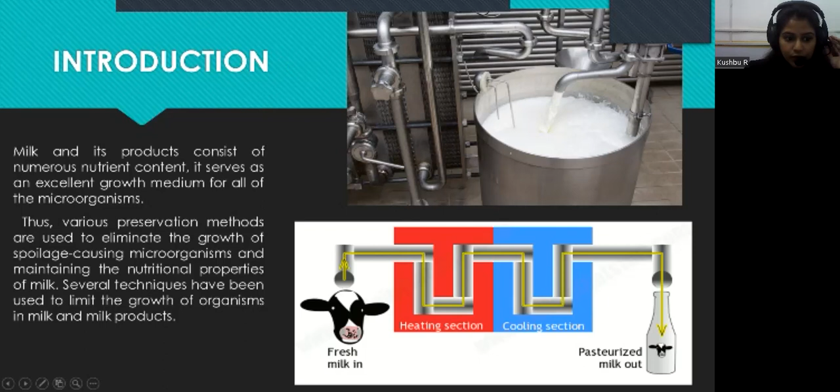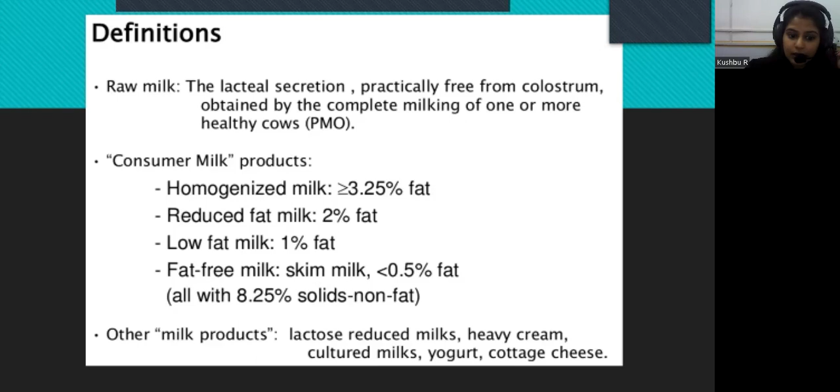Milk is the lacteal secretion of the cow usually, and milk from goats and buffaloes is also used for manufacturing various milk products. Milk is available in various forms based on their fat concentration. Based on percentage of fat content, we categorize milk into types such as homogenized milk, reduced fat milk, low fat milk, and fat free milk, that is the skimmed milk.

The temperature involved in pasteurization or simple sterilization is about 63 degrees Celsius to 105 degrees Celsius. As we increase the temperature, the time duration required reduces, so they are inversely proportional.

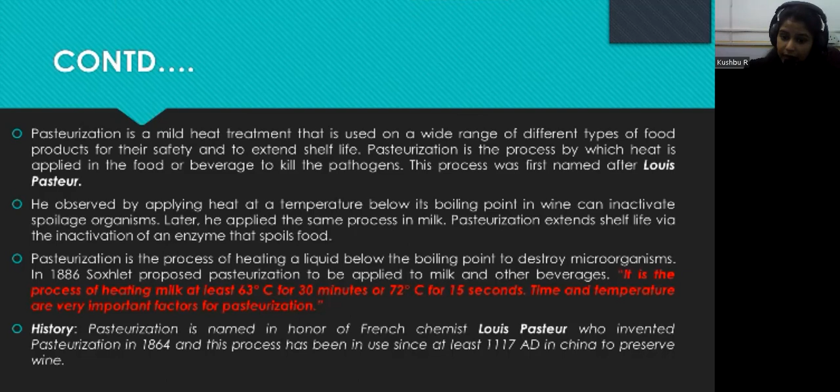One such effective methodology in sterilizing milk is pasteurization, which was invented by a French chemist called Louis Pasteur, thereby the name pasteurization. This is one of the primitive methodologies invented, yet still very beneficial today. Pasteurization is the application of heat at appropriate temperature for appropriate time.

This completely aims at reducing the pathogenic count and also the organisms that can cause spoilage of milk.

Pasteurization is of various types. We call VAT pasteurization or low pasteurization, where the temperature required is minimal, that is 63 degrees Celsius, for a time duration of about 30 minutes. Next we have high temperature short time, where we require about 72 degrees Celsius for 15 seconds.

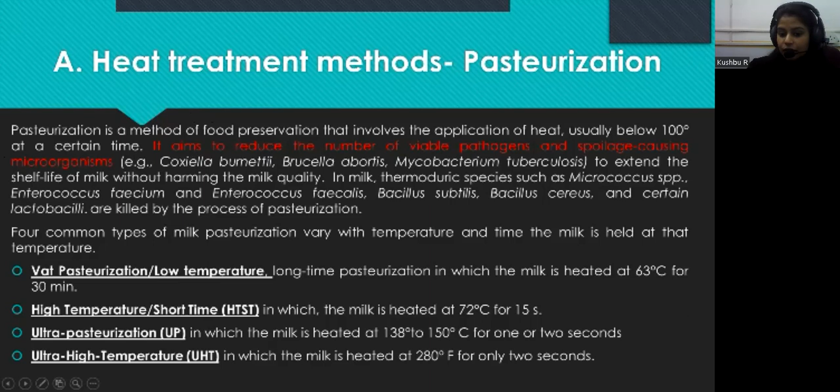Ultra pasteurization uses a temperature of about 138 to 150 degrees Celsius for 1 or 2 seconds, and ultra high temperature is about 280 degrees Fahrenheit for 2 seconds.

We always tend to assume that pasteurization is meant only for milk. Apart from milk, we also pasteurize various other products such as beer, canned goods, dairy products, egg, juice, nuts, syrups, vinegar, water, and even wine.

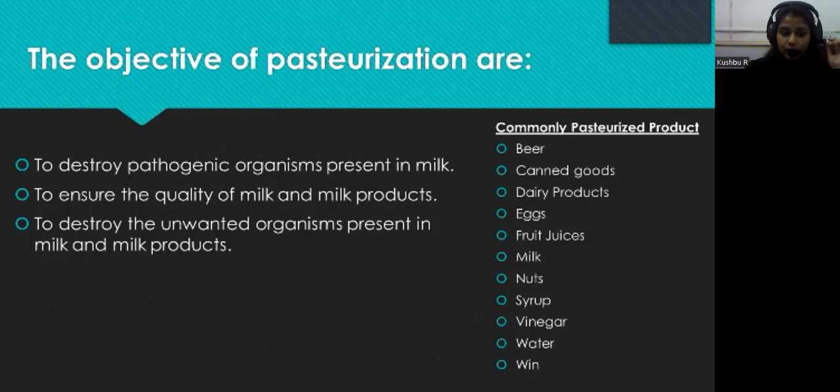The main objective behind this methodology is to destroy the pathogenic organisms present in the milk due to milking, packaging, or processing, and also to ensure the quality of the milk to its fullest, as well as to destroy unwanted microorganisms present.

Regarding the types of pasteurization, high temperature methods have varying temperature with time. Ultra high temperature or ultra pasteurization uses about 280 degrees Fahrenheit, which sometimes not only harms the organisms but also coagulates the proteins. It also damages the vitamins, minerals, and some protein globules present in the milk.

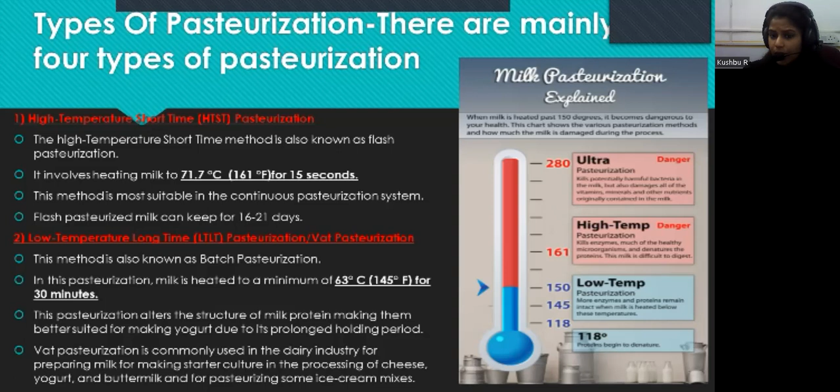High temperature pasteurization kills and inactivates the enzymes, but also gets rid of all the pathogens present. Low temperature pasteurization leaves the proteins and enzymes untouched, removing only the microorganisms. 118 degrees is the most friendly temperature, but above which the protein starts denaturing.

So these are the four types of pasteurization based on their temperature and time, which is inversely proportional. The advantages are maintaining the quality of the milk and making it free from any sort of pathogen. The disadvantage would be that it diminishes the cream line or cream volume.

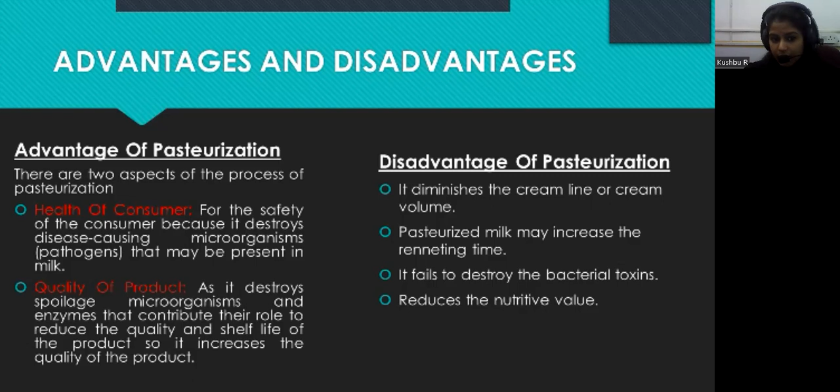Pasteurized milk may also increase the renneting time, and it fails to touch the bacterial toxins. At times the bacteria is not the one which causes the disease, but its toxins. During pasteurization the toxins are left untouched, and because of the high temperature there is denaturation in the protein, alteration in the enzyme or protein globules, making them less nutritive in nature. So using an appropriate temperature is very important.

The next methodology we're going to see in today's class is sterilization or ultra high temperature, which mainly focuses on pasteurizing the milk in such a way that it can be saved or stored at room temperature henceforth. After this sterilization process, it is fit to be stored under room temperature. This ensures destruction of complete microorganisms, including pathogenic organisms and organisms which cause spoilage.

Here they're going to bottle the milk and then pasteurize them together at about 105 to 110 degrees Celsius for 30 to 45 minutes. At times, they are sterilized in a big rotator or drum for about 135 to 150 degrees Celsius for about 1 to 2 seconds, and then fill them in sterile bottles. This is called the aseptic methodology.

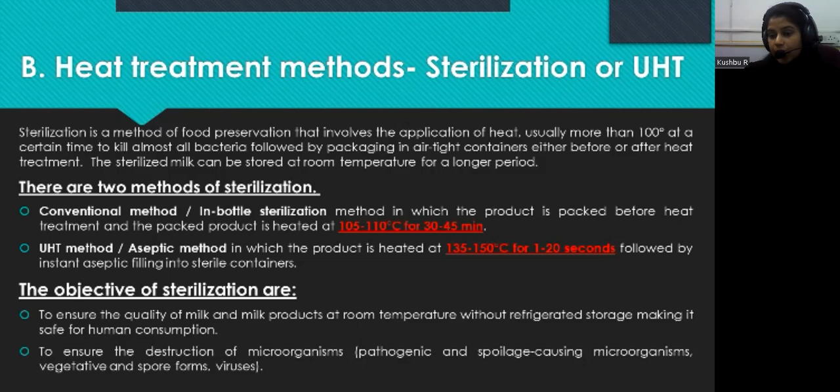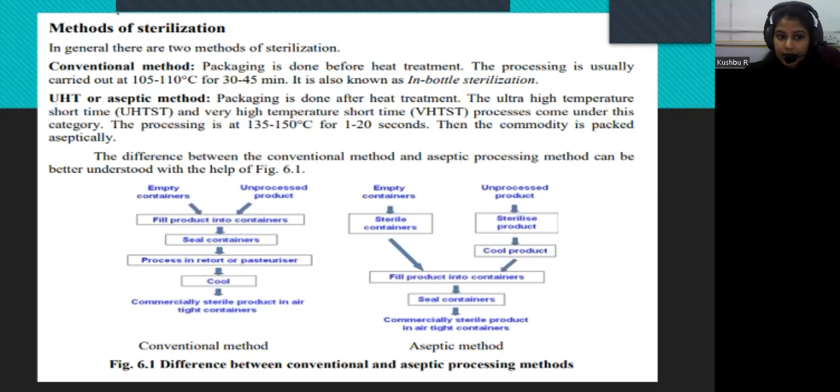In bottle sterilization, or the conventional methodology, you pack them and then sterilize them. These are the simple methodologies involved in the conventional method and the aseptic method. To speak about sterilization in mass, here we sterilize the milk in mass concentration quantity in the horizontal retort or vertical retort.

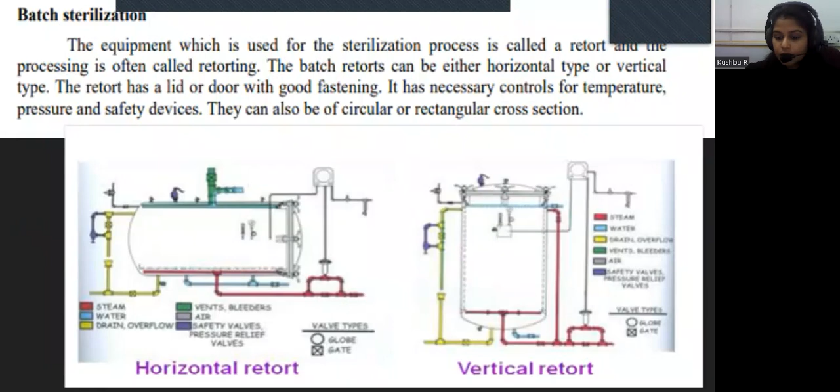Then we have the heat treatment methodology, believed to be one of the important methodologies, where dehydration of the milk occurs, thus obtaining dried milk, powdered milk, or condensed milk. But here we are going to mainly focus on the powdered milk.

The main objective is to ensure complete removal of water, thereby removing the organisms, because the minute you remove the water quantity, it becomes an improper or unfit habitat for the microorganisms to reside. This increases the shelf life of the milk, and also reduces the volume or weight of the milk, where the nutritive nature in the milk can be concentrated.

This happens via 3 ways: drum dryer, spray dryer, or fluid bed dryer. In the spray dryer, we pre-concentrate the liquid food, that is the milk, and disperse it through hot gas. Because of the evaporation of water due to the high temperature, there is a concentration in the milk quantity.

In the drum dryer, we have 2 rotating drums which rotate around, connected to a heater. Because of the internal heating coils, the drum concentration and temperature would increase, thereby removing the water.

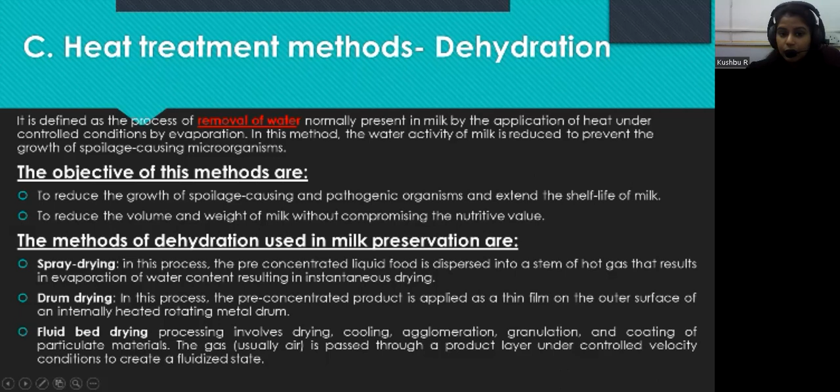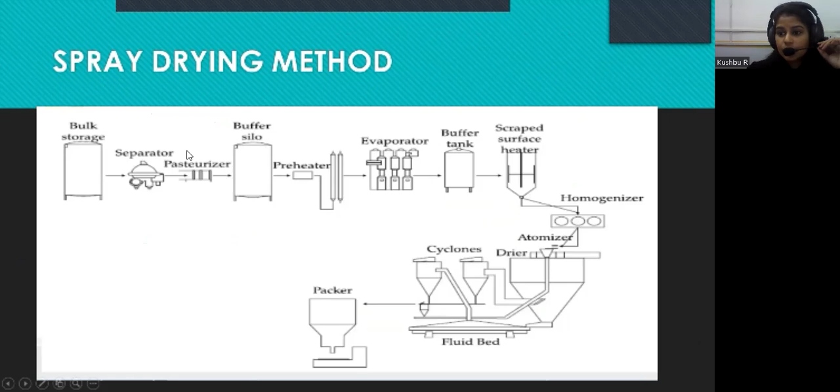Fluid bed drying methodology involves cooling, agglomeration, granulation, and coating the particle material into its air dried form. Thus, the globules are also protected. The milk is now powdered, which is the dehydrated milk. This is a simple methodology maintained in industries to obtain powdered milk, especially for neonates.

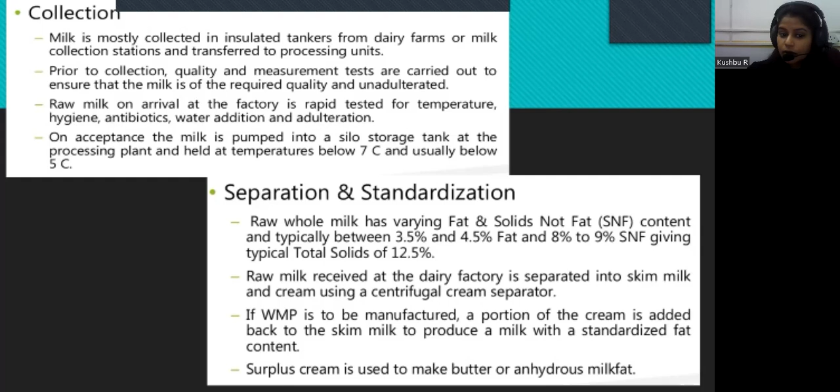The first thing is the collection and quality analysis, that is the separation and standardization based on their quality, and also the quantity of the solid-not-fat content and the fat content, and about the normal proteins present in them.

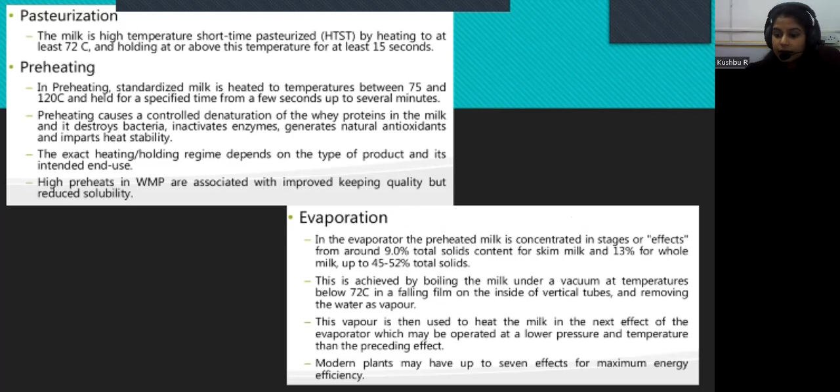Pasteurization process: of course, before we go ahead with the production of powders, we heat them, we sterilize them, as in we pasteurize them, and then we preheat it in such a way that the evaporation process starts. And in the ultimate evaporation process, which happens around 72 degrees Celsius, the water is completely removed from the milk. We know water is the most major constituent of the milk. When that is removed, all the other mineral constituents are left behind.

And then the homogenization is not really done usually, but it is also done in order to obtain the whole milk or the buttermilk being processed properly to decrease the fat content. By heating, here we have the drying chamber, which ensures the leftover water to be evaporated, increases the energy available for drying, and also decreases the viscosity of the thus dried milk. And also air filtering prevents contamination, so any sort of dust or particulate matter can be removed.

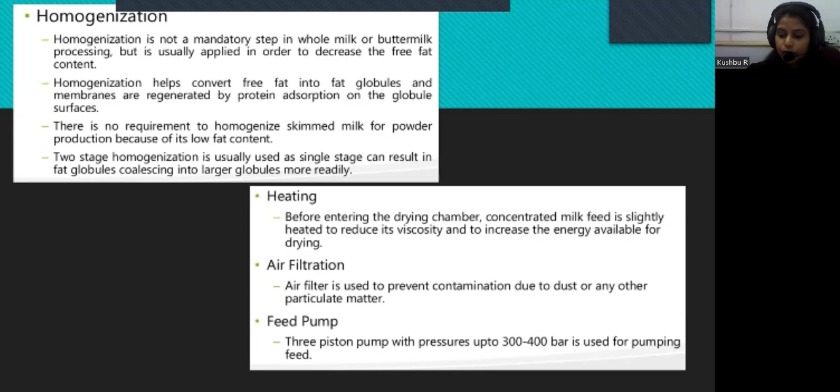And then we have the feed pump. A 3-piston pump with a particular pressure is used to pump the feed. So atomization is a very important process, where we are going to produce droplets of milk powder of about 10 to 200 µm, where about 40 to at least 80 µm should be produced, where these droplets result in the higher surface area, which aids in drying.

The minute they are atomized, they are not easily dispersed off. They will sit retained inside the holder. So this atomization would keep the powder intact, so the milk powder or the concentrated form wouldn't be wasted. And then we are going to introduce them to the drying chamber, where we introduce them to hot air that is blown, which ensures complete removal of water.

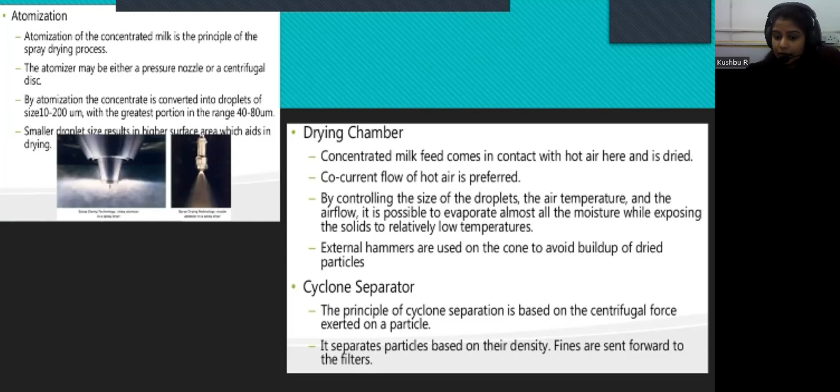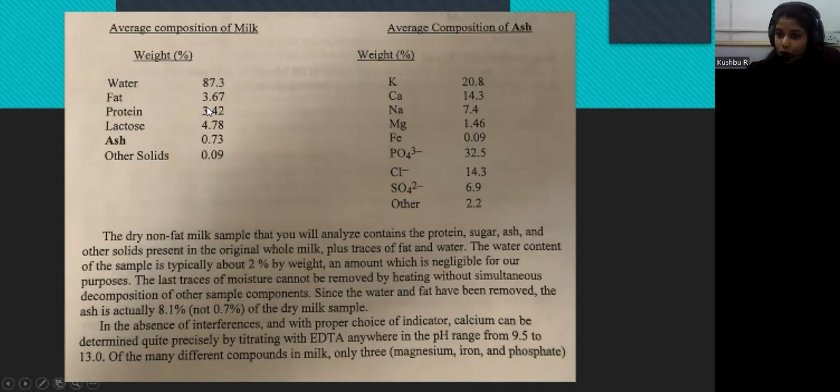Then the cyclone separator is based on the centrifugal force exerted on the particle. This cyclone separator is very important in maintaining the density of the particle, and sends the fines forward to the filter henceforth. Here we know water is the main constituent of the milk. After it has been brought down into a powdered form, except the water, everything else remains constant, in a much more concentrated way.

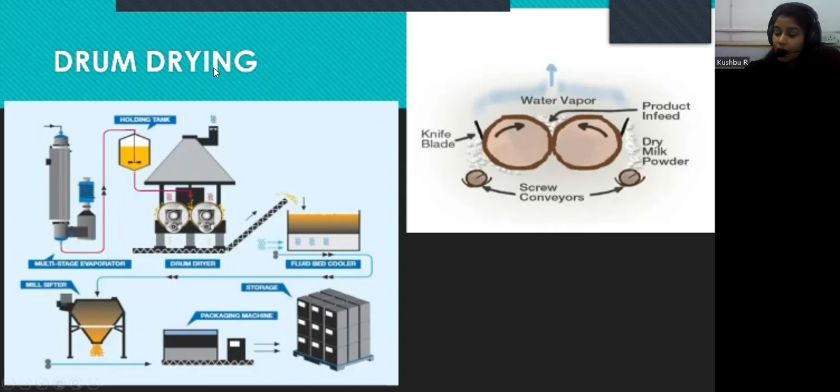Where we were speaking about drum drying, this is the way which is most effectively used. We have two drums rotating around, fitted with internal heating coils. Because of the increase in temperature, they evaporate the water content in the milk. Thus the concentrates of the milk reside on the top of the drum. They are scraped off using the knife blade and stored in the storing tank. So this is an important methodology over the fluid bed or other methodologies. This is most commonly used in the industries, most effective, easy, and less time consuming comparatively.

Thus packaging and storing becomes again an important part, where the milk is packed either in plastic or a multi-walled bag, or an airtight bag, which is also filled with nitrogen gas, which acts as a preservative gas, which will not allow the oxidation of the contents in the milk, and also maintains the flavor of the milk, thereby increasing the shelf life and maintaining its quality as well. Packaging is always a challenge, because you should keep it away from any sort of contaminants, moisture, sunlight, air, oxygen. So packaging and storing them in a right way is very, very required.

The bags in which we store the thus obtained powdered milk have to be of several layers so that they provide a mechanical barrier against any sort of unfavorable condition or contaminants. So packaging, storing and transportation have to be equally concentrated on.

So these are the three important methodologies that we have learned in today's class, which include pasteurization, sterilization, and dehydration, where the dehydration directly correlates to the dried powdered milk. So these are the three important, effectively used methodologies in the industries to process and preserve milk.